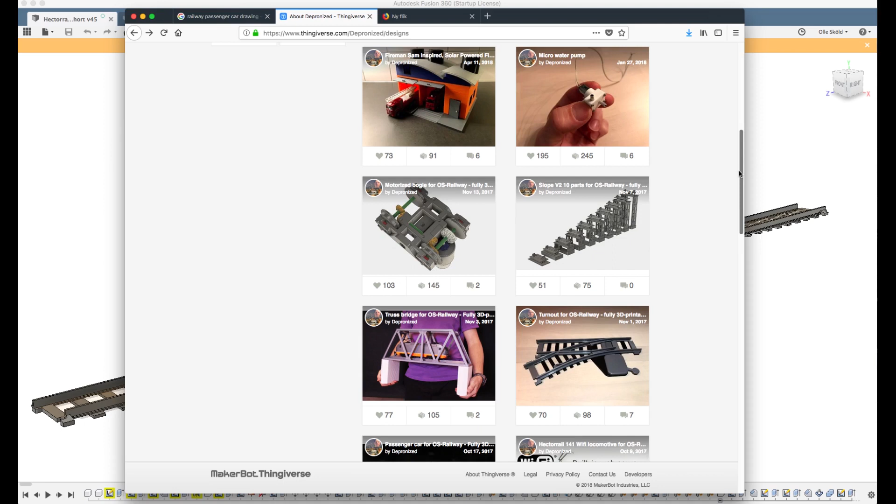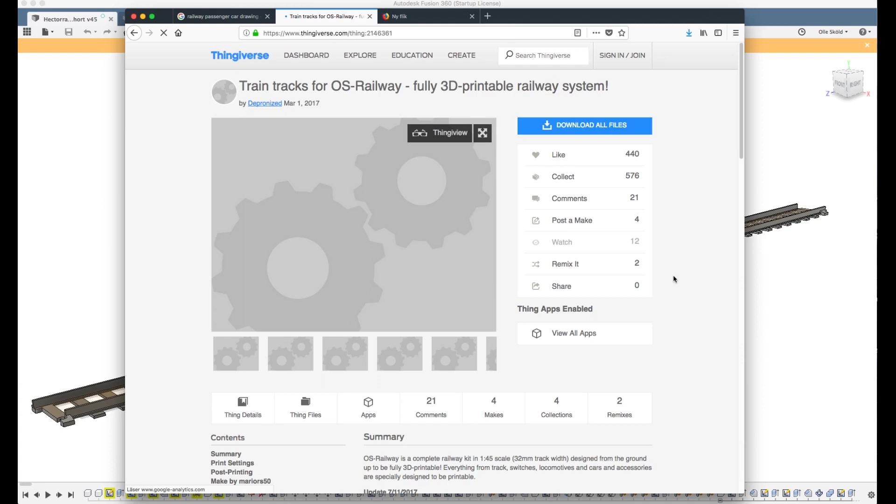It's mostly available on Thingiverse. If you go into Thingiverse and search for either Depronized or OS Railway, you will find the different parts. There's a page for track, and there are also 2 motorized locomotives at this point that you can download for free, print, and build. But in this tutorial I will show you how you can make your own car.

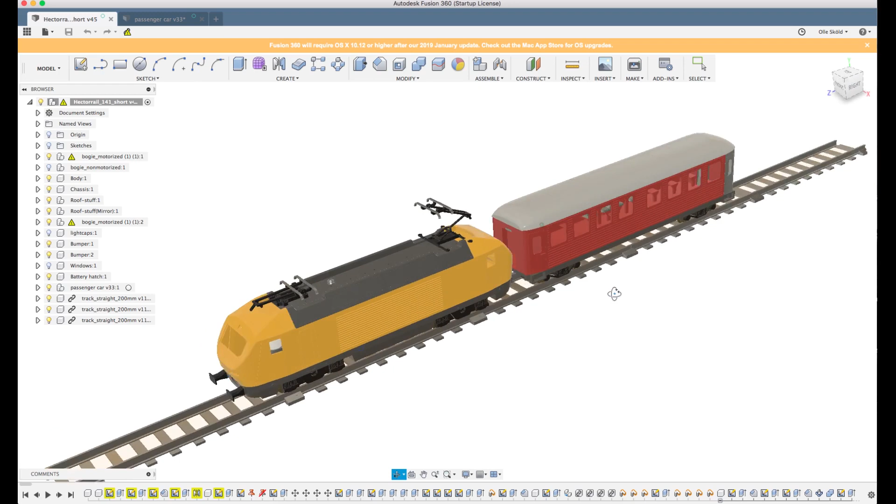This is how the project looks in Fusion 360. I'm using a really old computer, a 2008 MacBook Pro, and you can see it's still working pretty good. There are some hiccups at some points, and I wouldn't recommend doing very tough renderings, but working with mechanical designs is no problem at all.

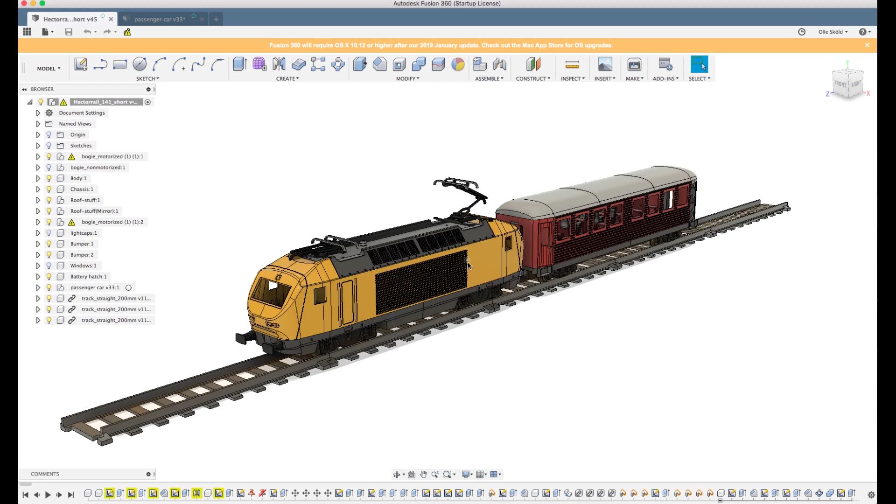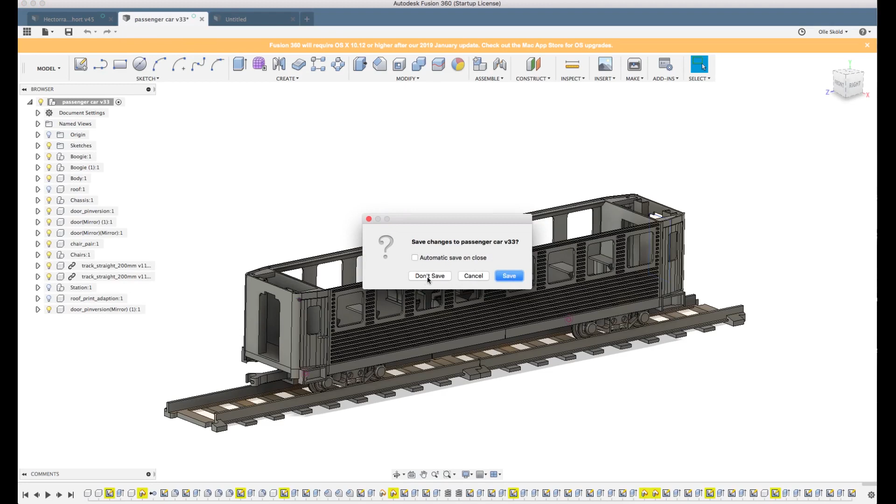So you don't need a fancy computer for this. What I will show you is how you can, in the easiest way, make a passenger car, and it's really unnecessary to do everything from the ground up. I have prepared a few things that you can download and import into Fusion, so I will show you how to do that.

You go to my webpage depronized.com, and you click on forum main page, and you scroll down to the OS Railway printable, the 3D printed railway section, and you click on CAD files. There you can download the track in step format, and you can also download the bogie, because if it's the first time you're drawing something for this, it's unnecessary to draw the whole bogie from the ground up, since that's the most complex part.

So I'd really recommend that you import these pieces and start with that. I will show you how to do that. You click upload in Fusion, and you select the parts.

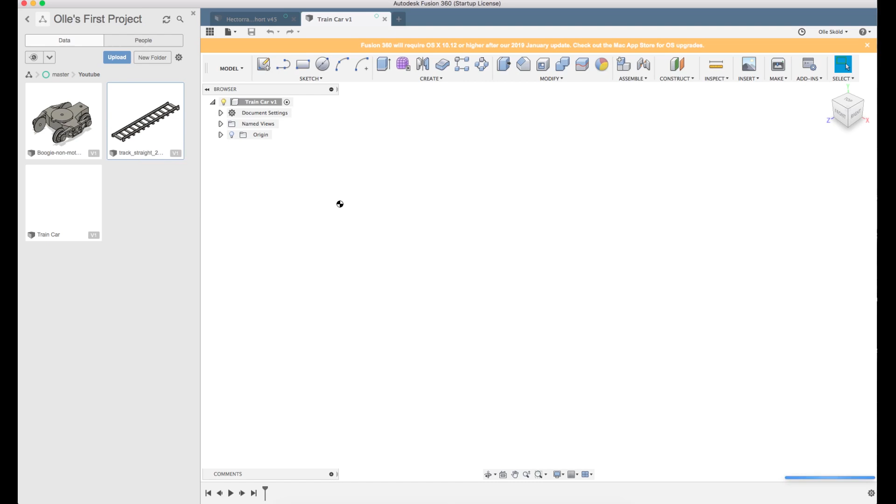To be able to import them into our project we have to save it first, so we'll call it train car. First I import the track section, and you can just click OK on the position.

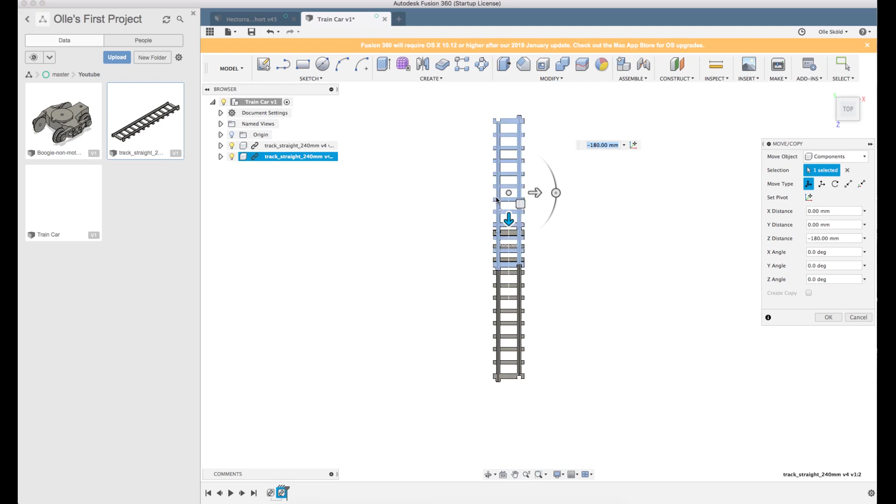I will import another one, so I have 2 of them. To change the orientation like I do here, I hold the shift button and click the scroll wheel on the mouse, and then I can turn around like this, or you can click on the little cube up to the right, but holding shift and the mouse wheel is really convenient.

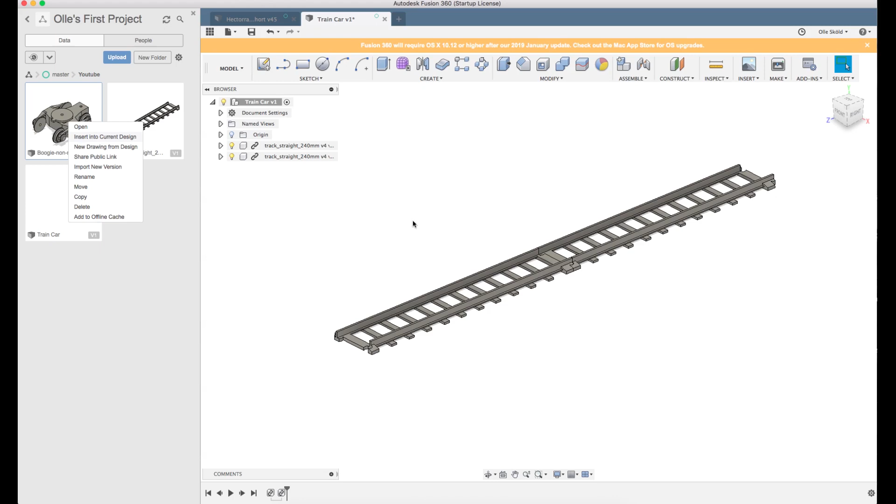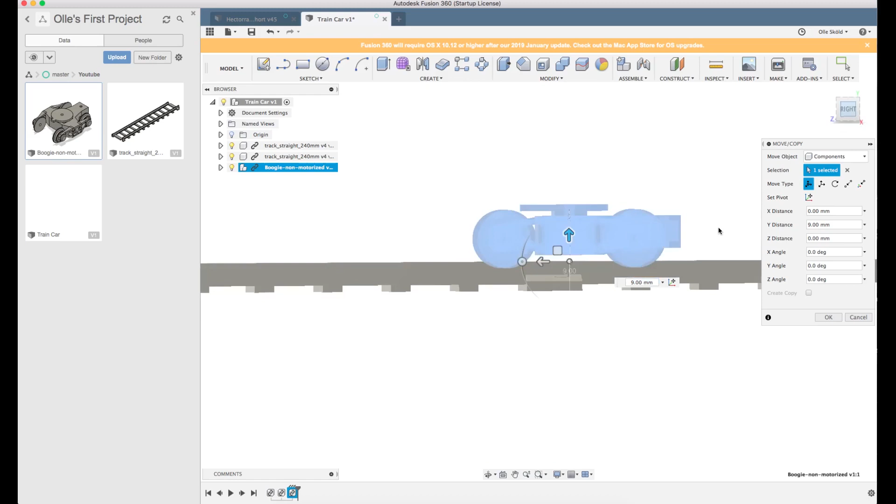Then our next task is to import the bogies. Now you can see that it ends up a little bit wrong, so we will adjust the position. It's not critical where you place the first one, it's the second one that is important, so you get the right length of the car.

I can see that I have it the wrong way, I will turn it around. The reason for that is so that the connection to the other cars is in the right place.

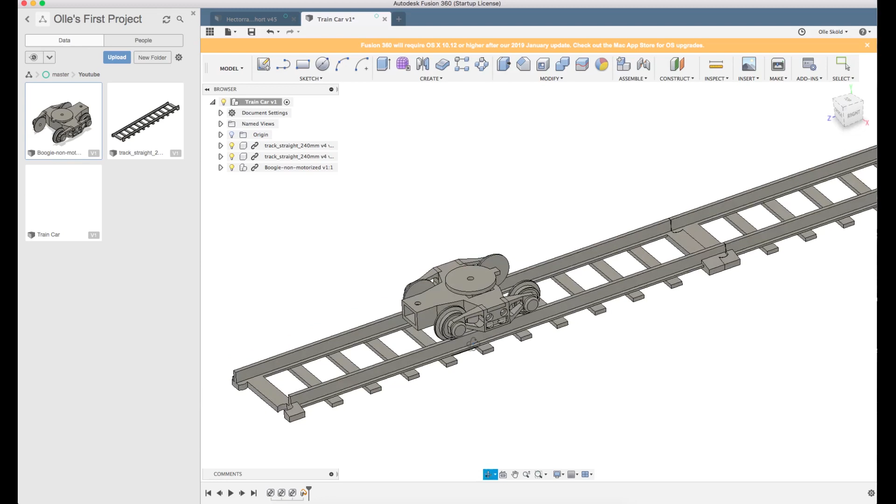Now I will not import it a second time, I will copy it, because then it will go from the same place. And this allows me to adjust the wheelbase.

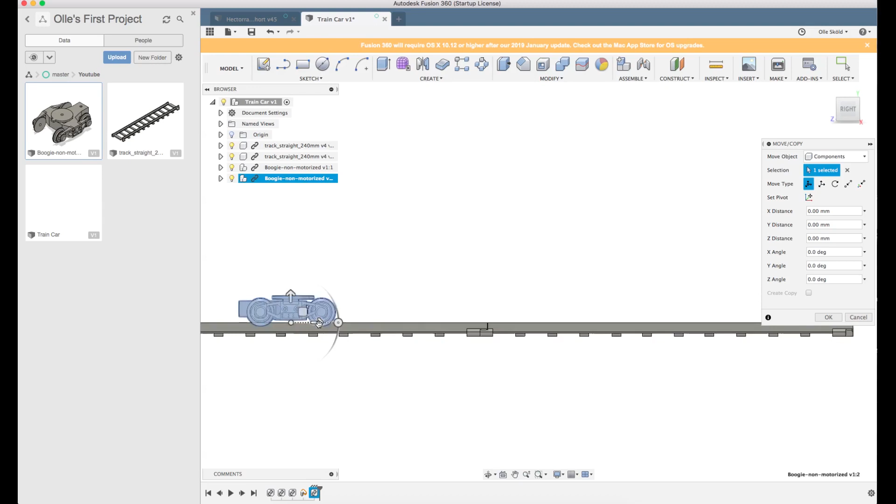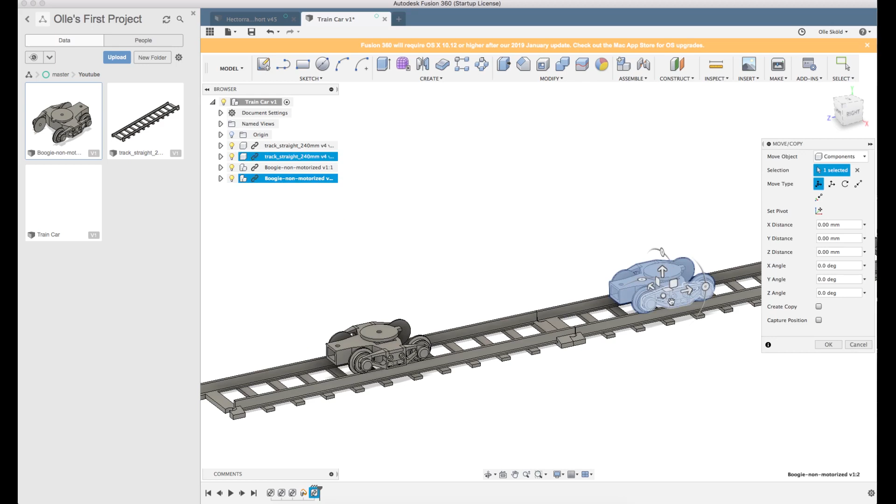What I found when I did cars is that around 200 millimeters is the maximum you should use, because otherwise it gets too long for the short radius of the track. So if you want it to really work well, don't make it longer than 200 millimeters. And we will turn the other one around.

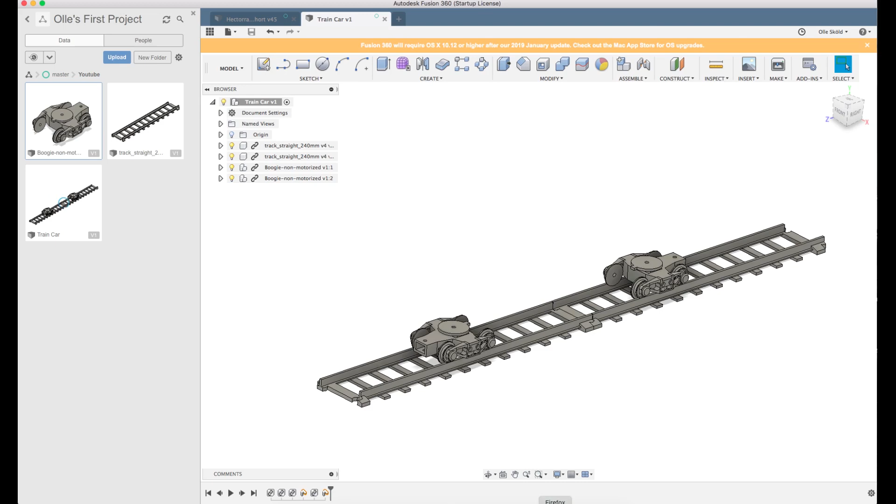So now we have a good starting point, and we will save it for now, because now we need some inspiration for the design. I recommend that you go to Google and make a Google search for railway passenger car drawings or train car drawings.

Or if you have a special car that you want to draw, search for pictures or drawings where you have it perfectly from the side, because that makes it a lot easier to model, since we will use the picture in Fusion. You cannot do that if you have a perspective view; you need it to be straight from the side.

You can also search for blueprint. That will also give you good pictures, but they are a bit harder to use. I will show you, because they are often only lines, so it's a bit harder to see the details.

On a Mac I will hold down Shift, Command and 4. That gives me the possibility to take a screenshot of just a part of the screen. If you're on a Windows computer, you can click on the start button and start writing snipping tool, and you can use that to basically do the same thing.

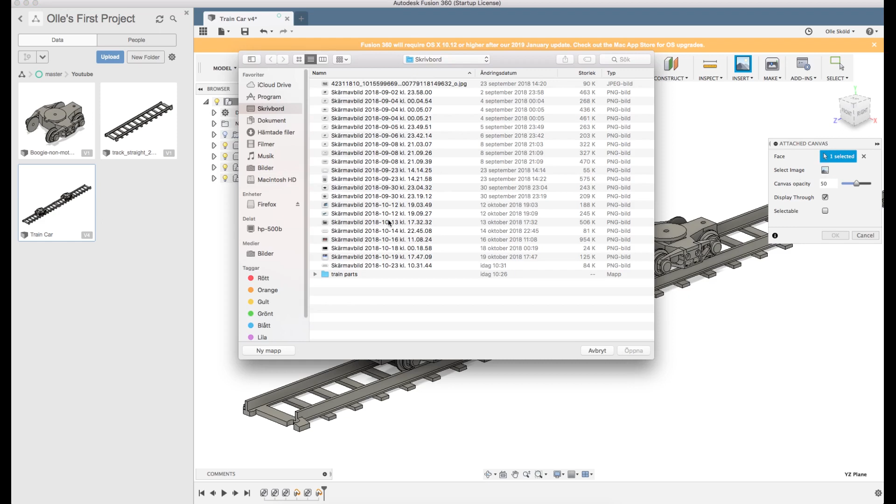Now we will import this into Fusion. So we click Insert, Attach Canvas, and we click the side plane, and we click the Select Image button and choose the screenshot. Now you can see that it gets super tiny, but don't worry about the position and the scale right now, because we will fix that.

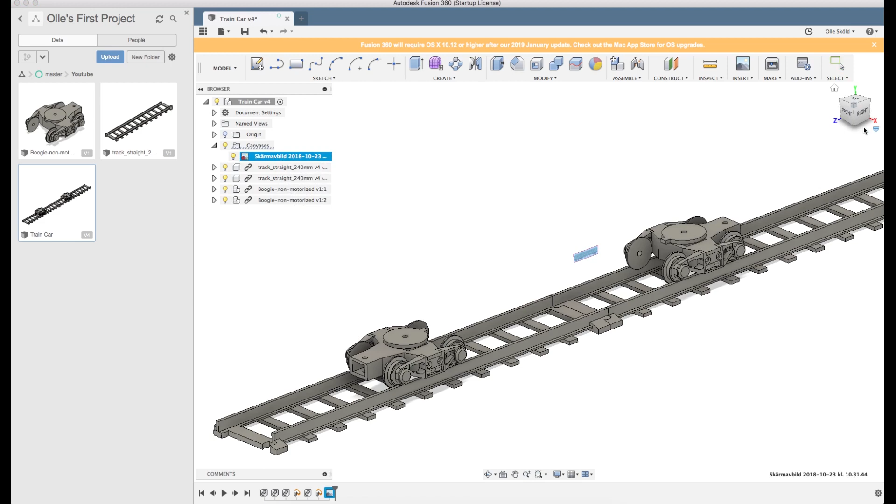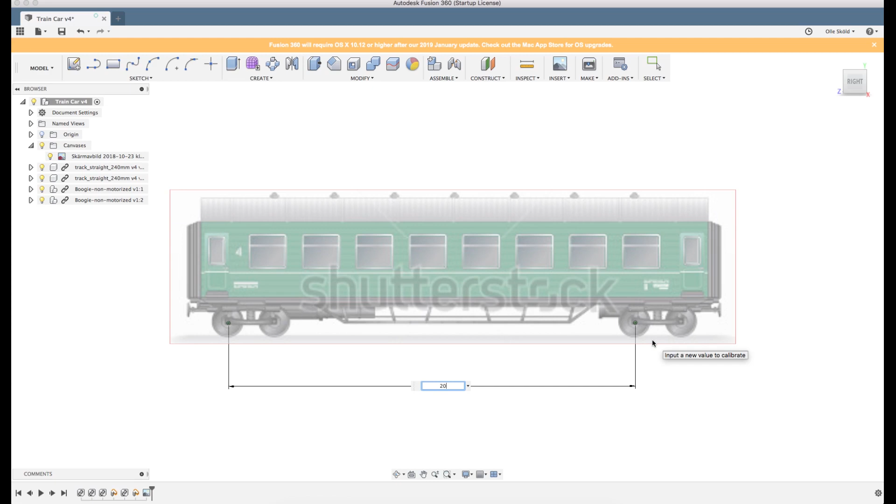Now Fusion has a really nice way to scale pictures. You right click and choose Calibrate. If you need to, first find out the dimension you want to scale it after—now we'll just try, because we don't really know already. So what I'll first do is click on two known points, and I will choose the dimension I think I want. In this case I will try 200 millimeters, and we will see how that looks.

And we can right click and choose Edit Canvas, and we can place it around and see how it looks. And we can now see that this is a bit small.

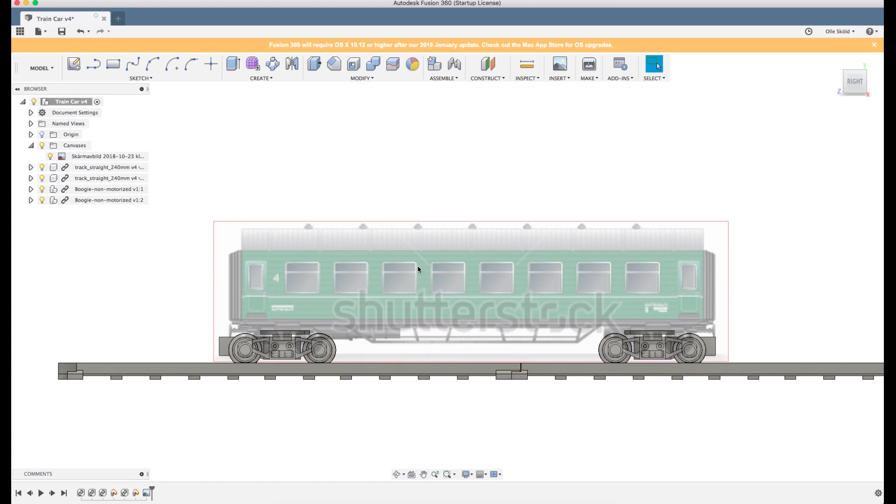So I will again click Calibrate, and I will choose the same position so I have something to relate to. And if it's hard to see, you can unclick the rest.

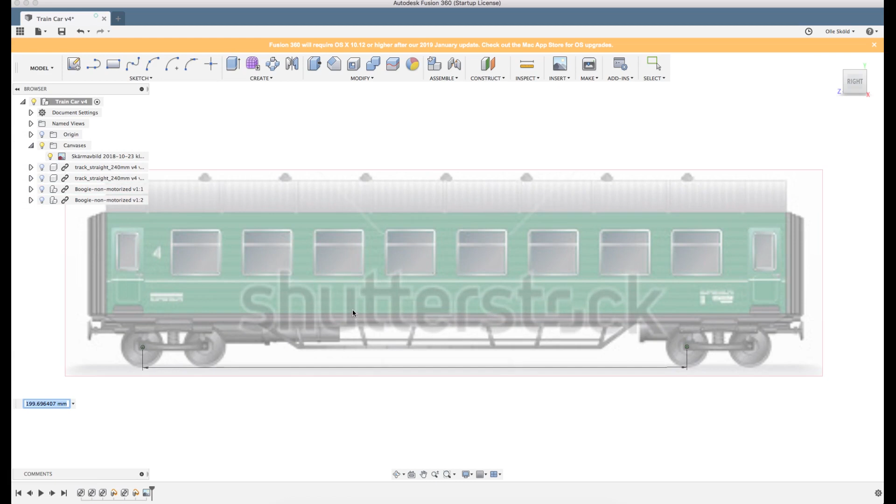How much do you think we need? I will add 40 millimeters and see how it looks. That's a bit too big, so I click Ctrl Z to undo.

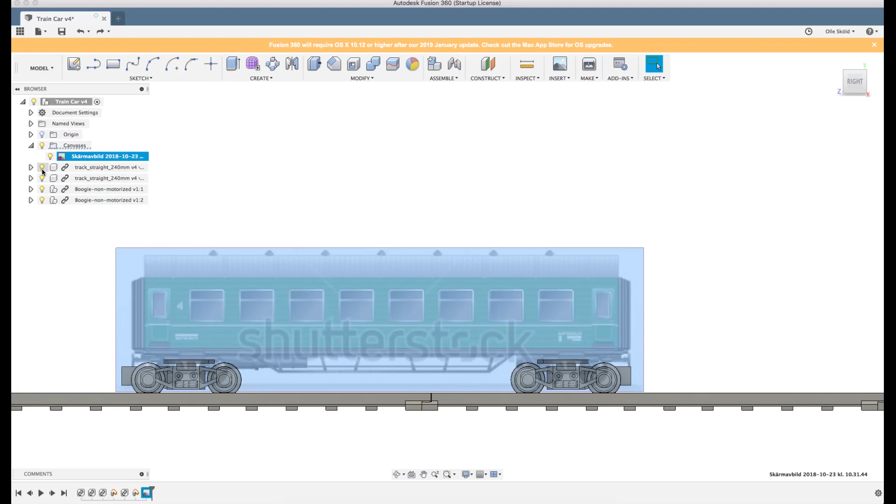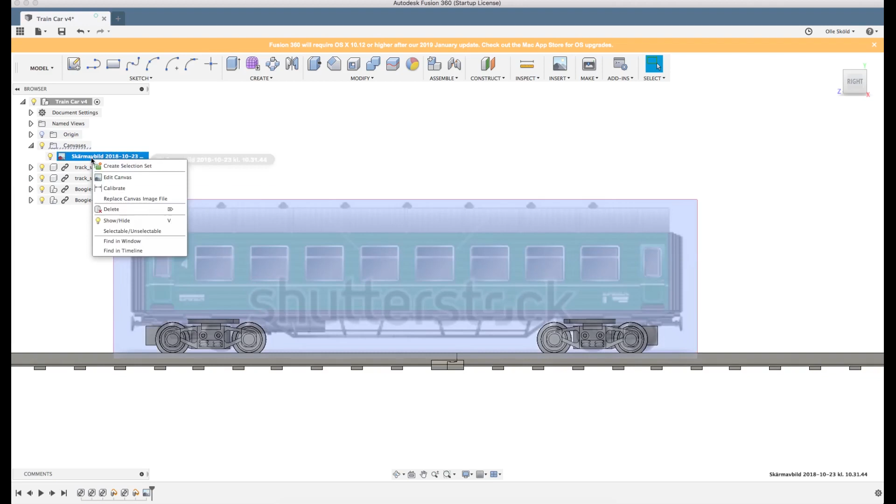Let's make it 220 and see how it looks. That looks better.

Now what I want here is a small overlap between the connection part here—I don't know what to call it—and the end of the train car. I don't want too much overlap here because then it will not work when you attach it to the locomotive and other cars. So this looks reasonable.

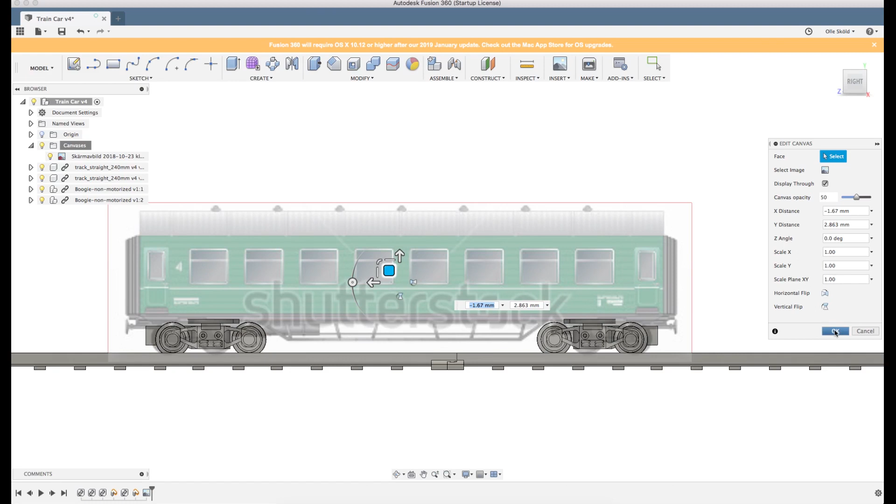So we will click OK, and now we will use this as a reference when we create the rest of the car.

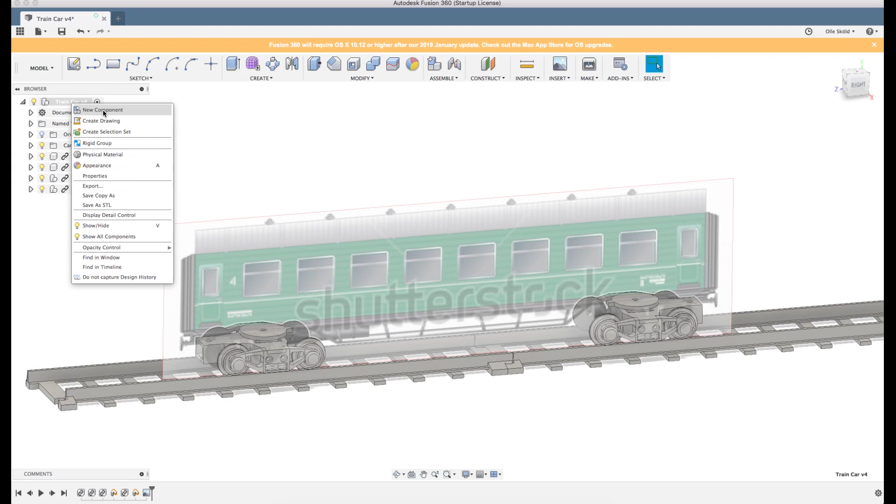Now one important thing to know in Fusion, to make it a lot easier to work with a project, is components. So you right click on the top and you choose New Component, and let's call this the chassis.

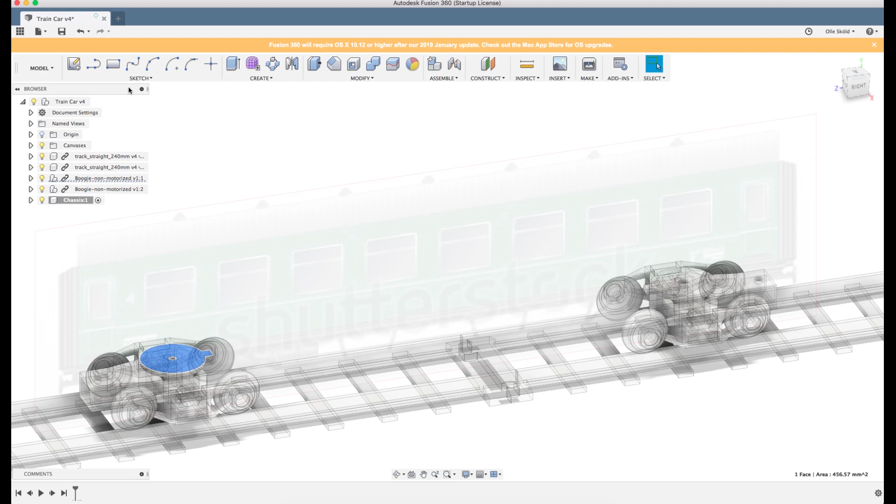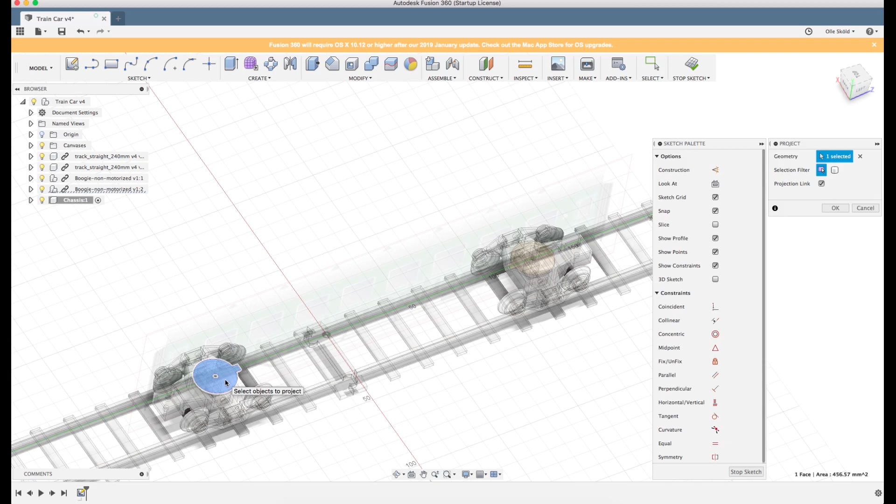And we want the chassis to attach to these plates. So what we'll do is we'll click one of them, and we click Create a Sketch, and you can see that one of them is now lit. But we want the sketch to know about the other one as well, so we can click P for project, and we can click the other one, and OK.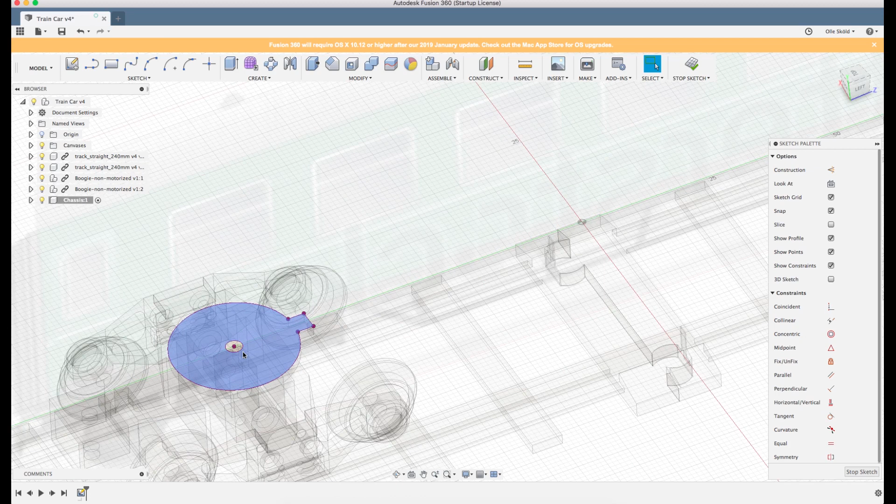We can also, if we want, click this one also, so it has the edges. Now our sketch knows about these edges and these parts that we want to connect it to. We want to make sure these holes for the screws end up in the right place.

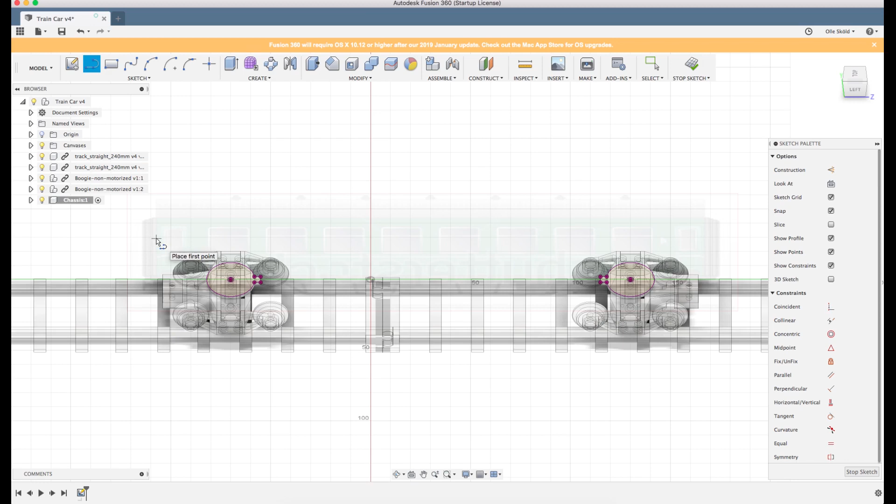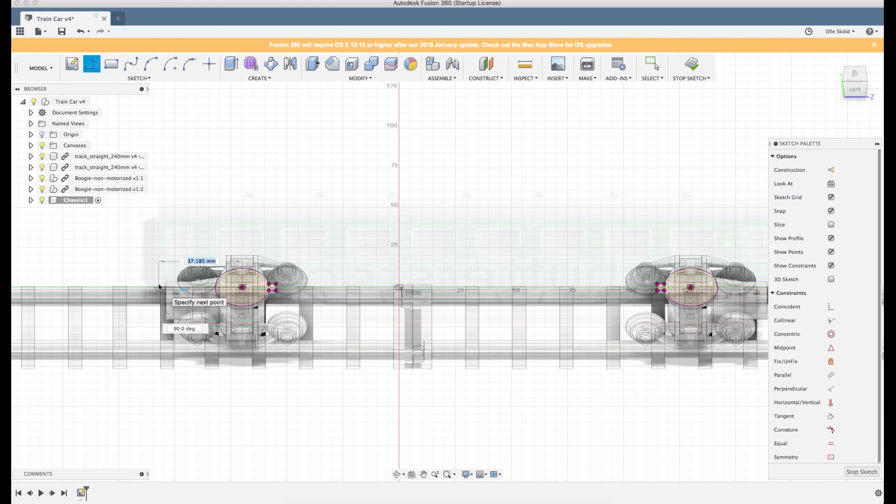Now one nice thing to do if you want to know how long you're going to make the chassis, you click on this side so you can still see your canvas and also see the sketch. What I'll do is click L for line and just click somewhere on the canvas to see how long it will be, 277. Let's see how long we need from the center of the bogie. It's like 37 millimeters.

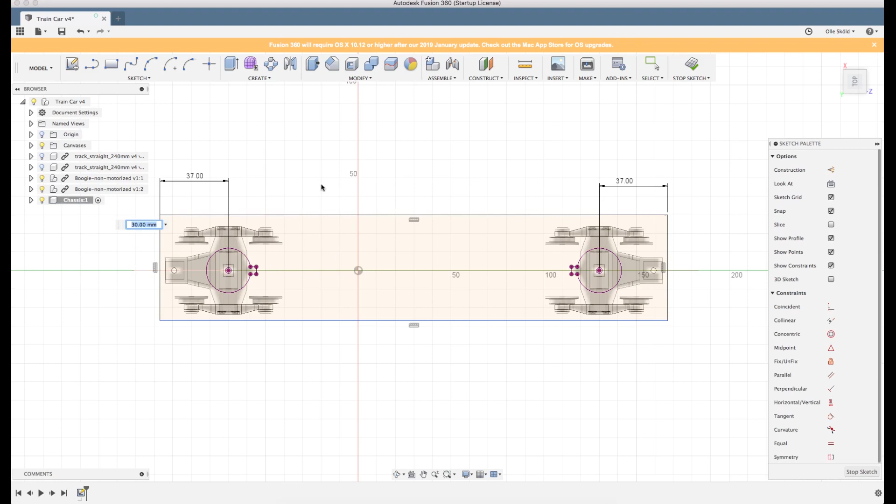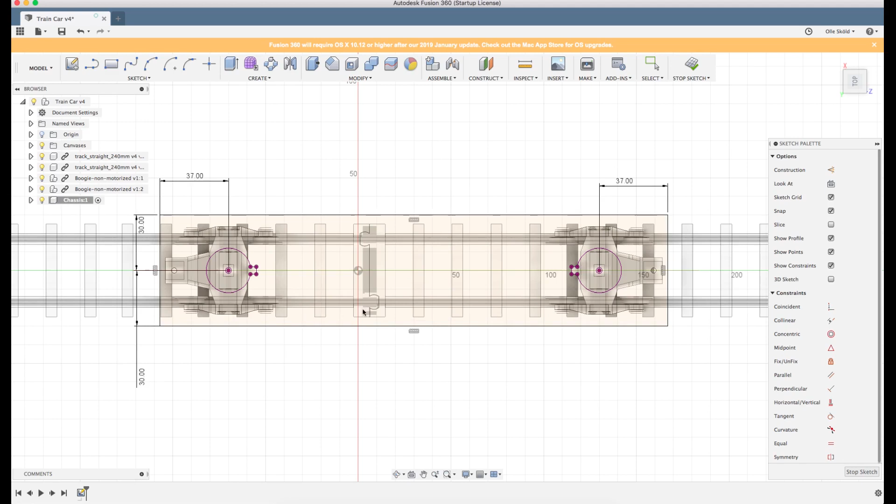So what we'll do now, I will hide the track so we don't have so much going on. I will make a square, I click R for rectangle, and insert the dimensions. Now we don't know exactly how wide we want it. I think I want it to extend a little bit outside the sleepers, so let's try 30 millimeters. We can change it later on if we want to. So there we have it.

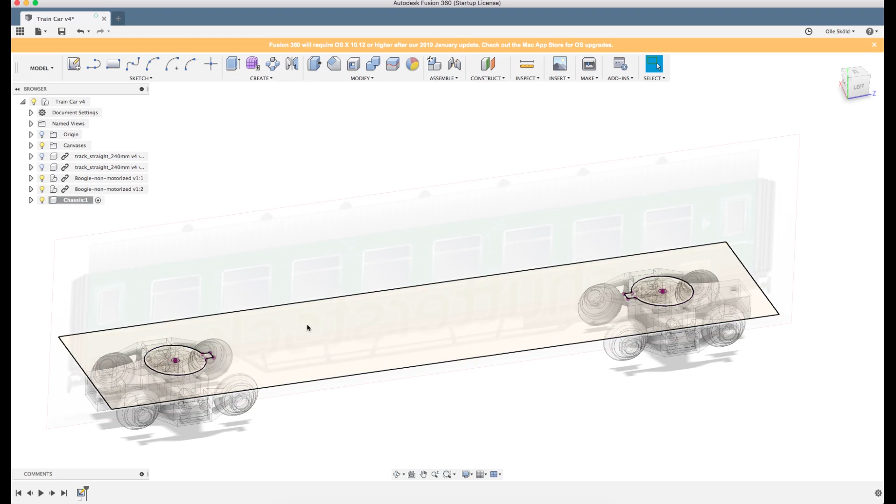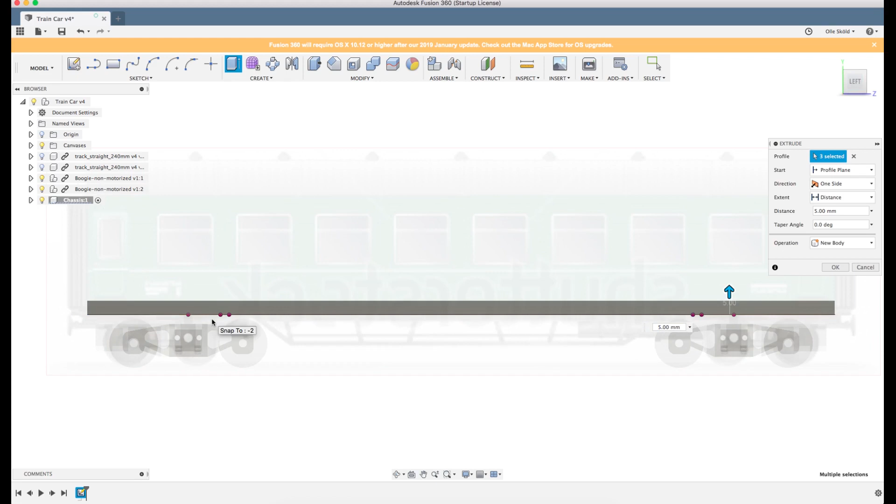Now I hold the command button so I can click several of the surfaces, because you can see these lines, otherwise they leave a bit that is not extended when I click extrude. So I need to click these as well, and then I click E for extrude. 5 millimeters seems to be a bit much, let's make it 2 millimeters.

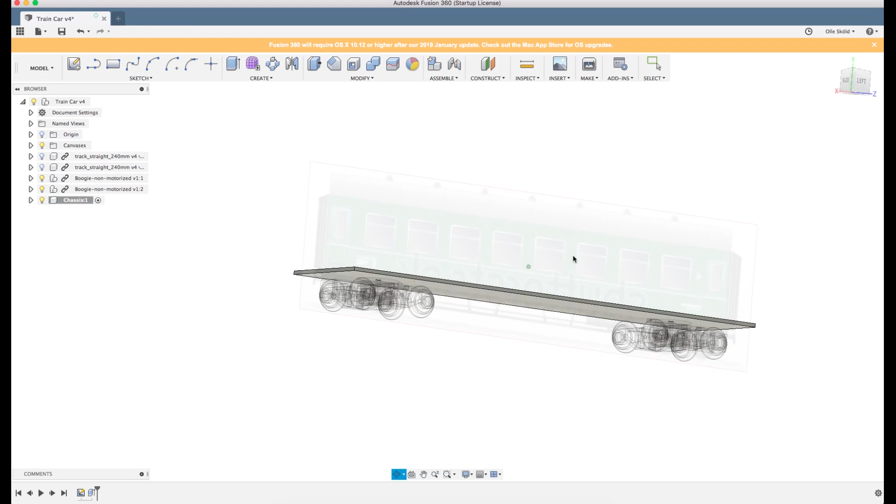Now if you want to see how it looks with the track and everything, you can right click at the top of the tree and click activate. That will make everything visible in the same way.

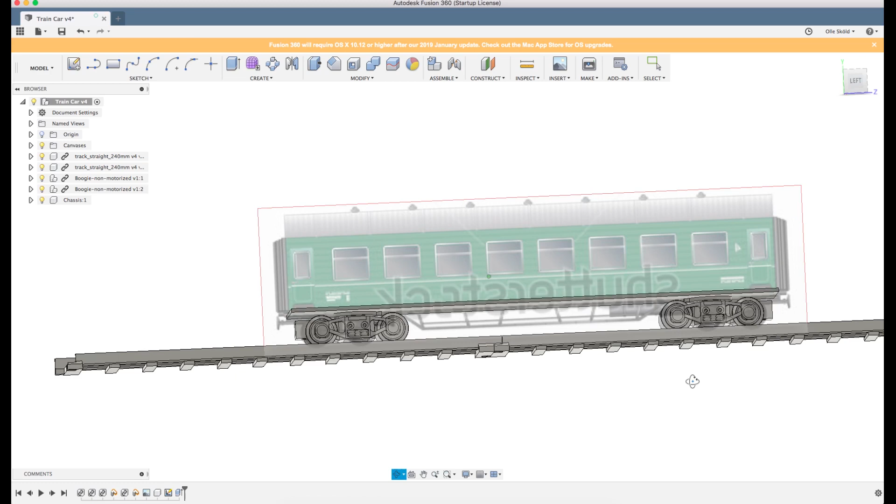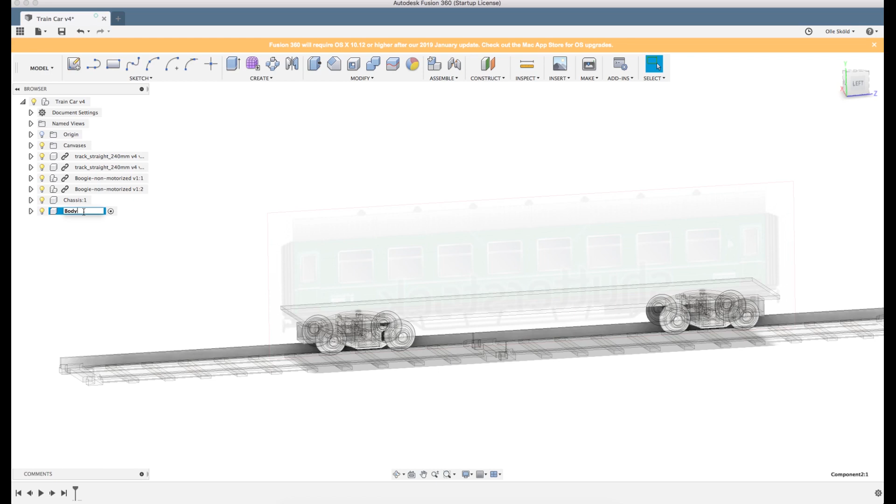Yeah, so let's start with that, and now we can make the body. So we create a new component and call it body. Now we click the top of the chassis, that means we will automatically get the edges.

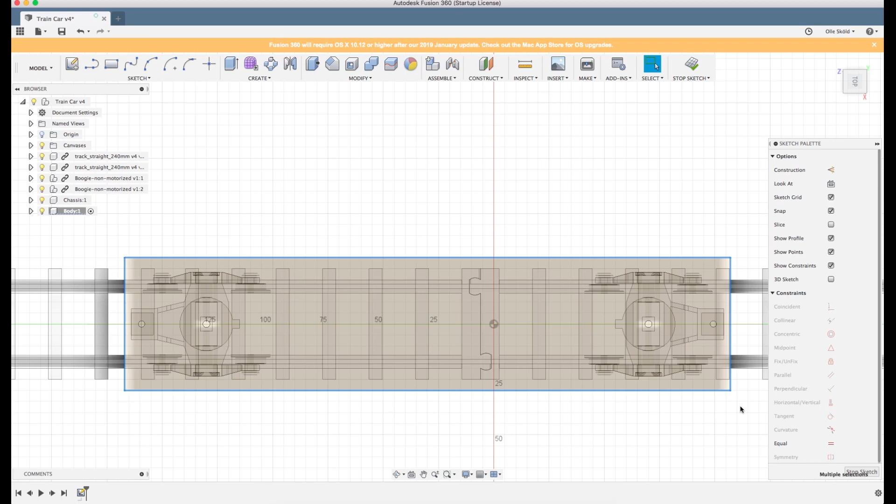Now what we can do, you can double click on the edge so you can see the whole edge is selected, and you can click O for offset. What this does is create a new line along the whole selected edge, and you can choose how far you want it. So what we're basically doing now is the thickness of the body, and I will make this one 2 millimeters thick.

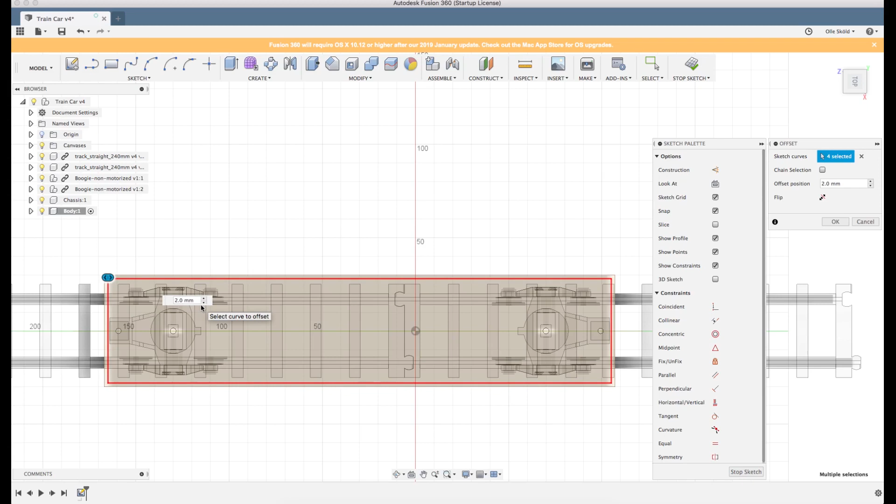Now you can either click stop sketch and click on a surface and extrude it, or you can do it directly in the sketch. I will do it this time. I will click the edge, and you can either click on the extrude button or click E.

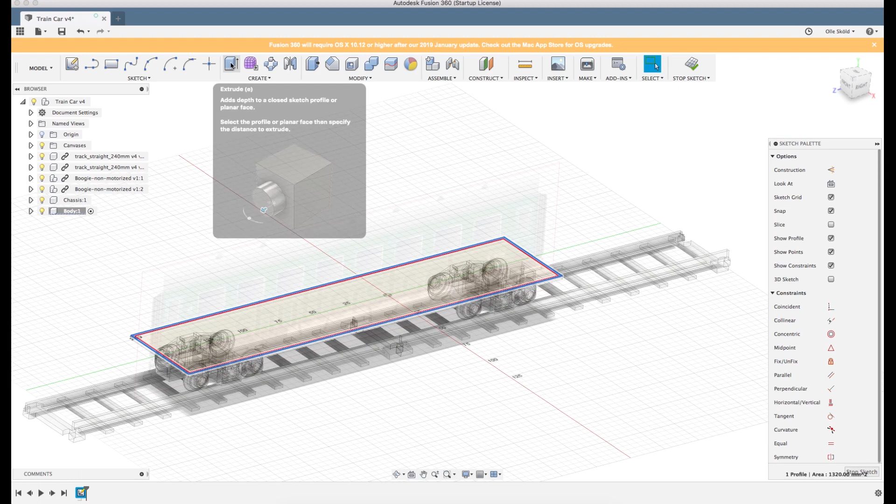I'm used to working with the commands now, but I will try to click some of the buttons so you can easier follow what I'm doing. So I will click extrude, and now I don't know how far I want to extrude this, so I will click the side view so I can look at the canvas at the same time, and we can extrude this up right up to the roof.

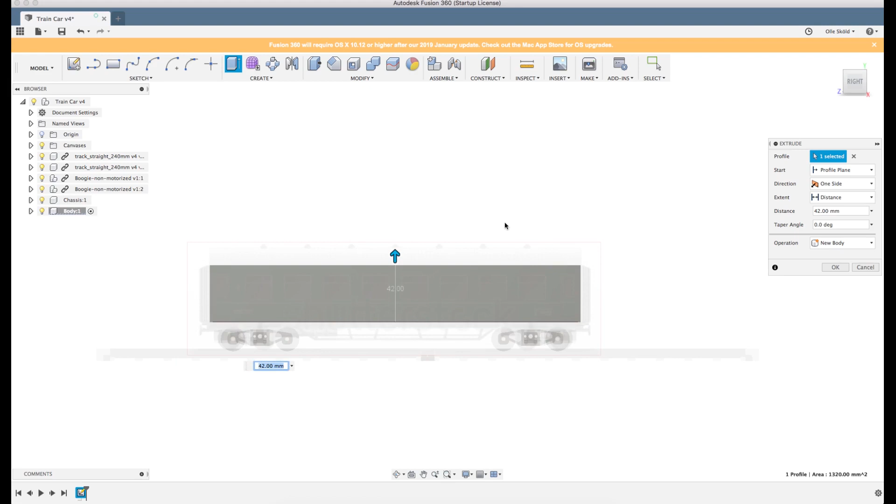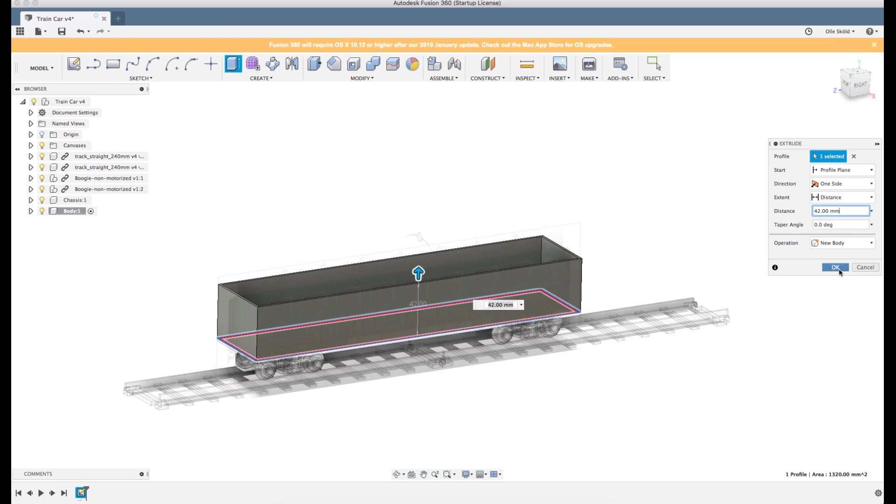Now you can see that the canvas is really dim. That's because it's not located inside our component. This is something that is a bit a shame in Fusion, maybe there's a possibility to make it more visible even if it's not in the component. I guess there's many times where you have a canvas that you use for many components, but what you can do is place it inside the components. If there is one you work with a lot of details, for example with a body, you could place it inside the component, and that would make it more visible when you're working. Especially if you have a lot of small details, I would recommend that you do that.

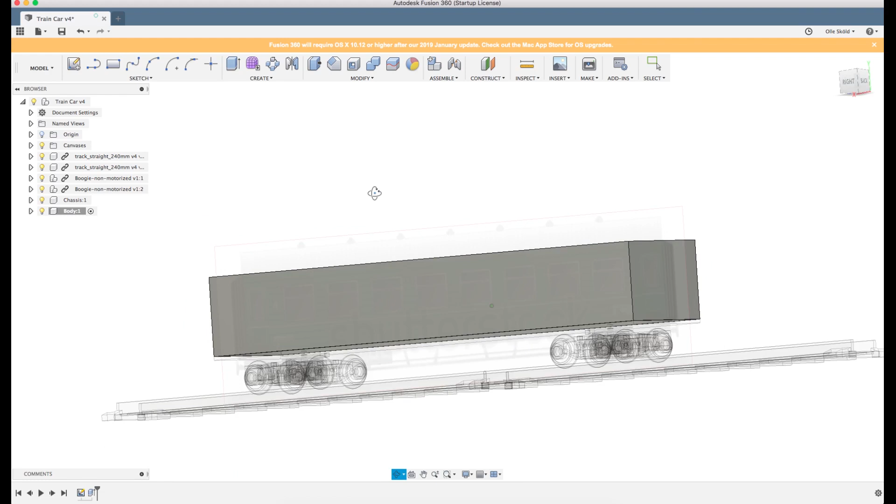So now we have the basic geometry of the body. So what we're going to do now is the windows.

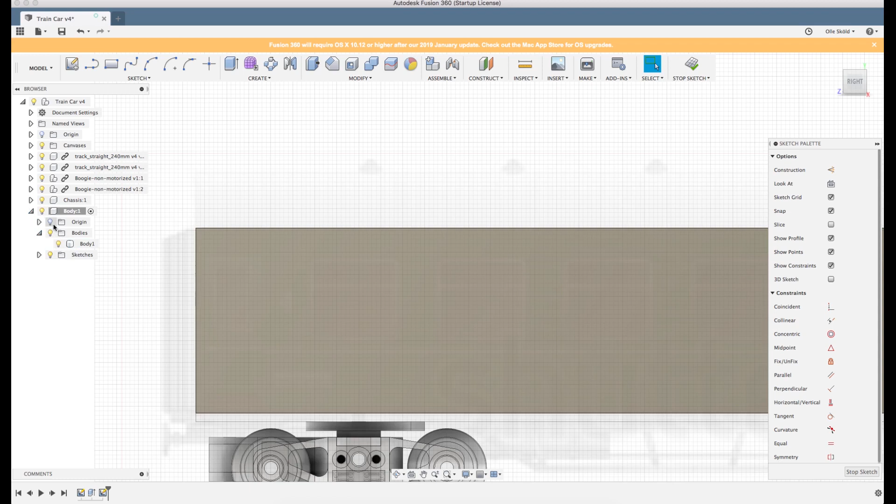So I click on one side and click sketch, and then I want to see these windows a little bit better. So what I can do is click on the component I'm working on. I click on bodies and unclick the body I've just created. That makes it a little bit easier to see what's going on. And now we will select the areas that we're going to remove to create the windows.

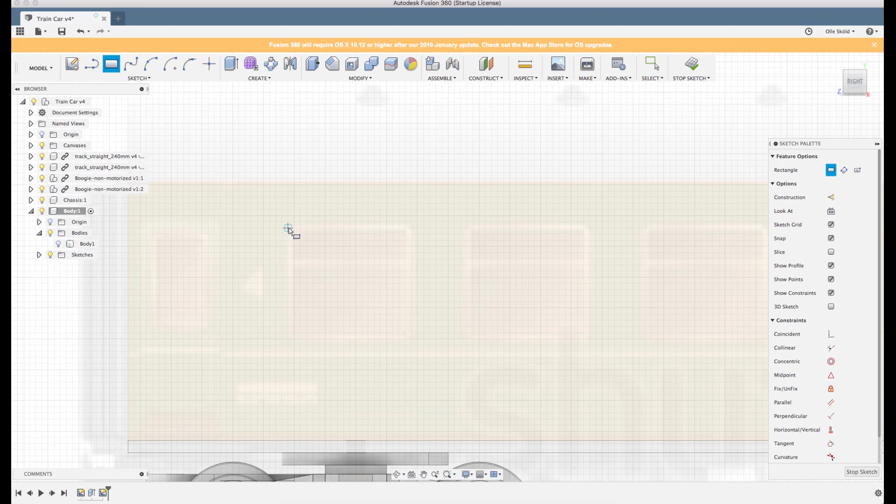And what we can think of now is, do we want a separate frame for the windows, or do we just want a cutout? In this case I will actually do a frame. So we'll do like this. We will select the whole window.

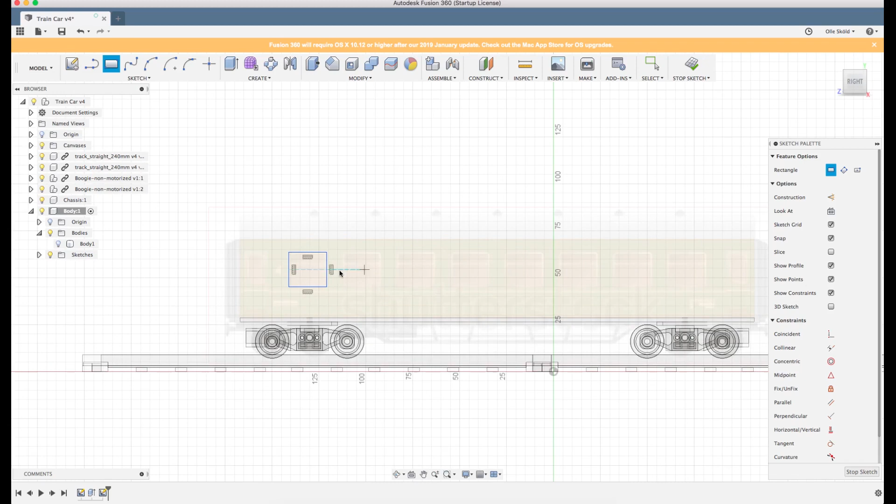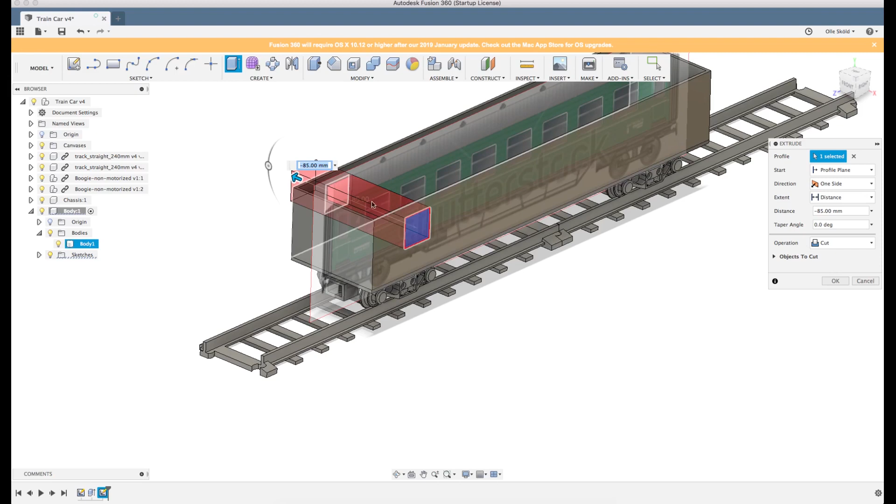Now if there's only a few of them, it's easy to just draw them, but I'll show you another thing you can do. I click extrude, zoom out, and now I have to select the body again so Fusion knows what I want to do. I draw straight through, and you can see it automatically turns red. That's because Fusion thinks I want to cut, and that's what I want to do in this case. So I click OK.

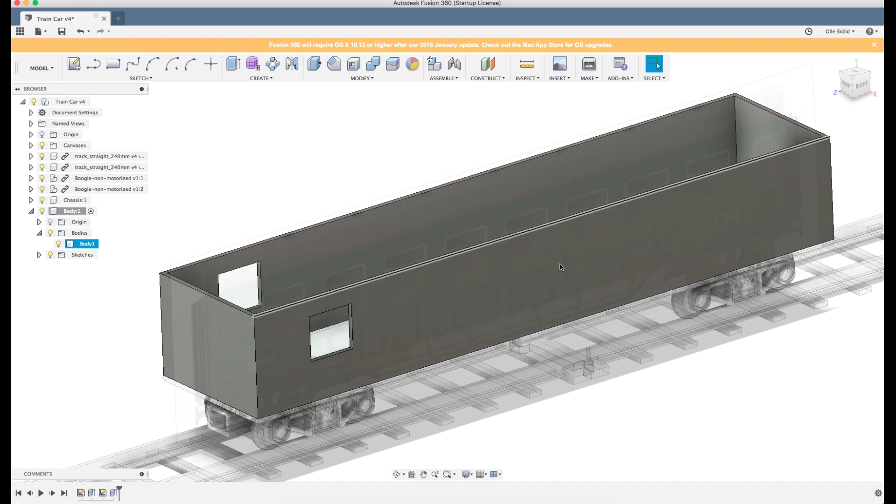Now that is one of the windows. Now what you can do if you have a lot of small details of the exact same shape and you want to do them on a straight line, you can use pattern on a path. It's a little bit sketchy, sometimes it doesn't work, it gives you really strange error messages. I don't know what they are, but we'll try.

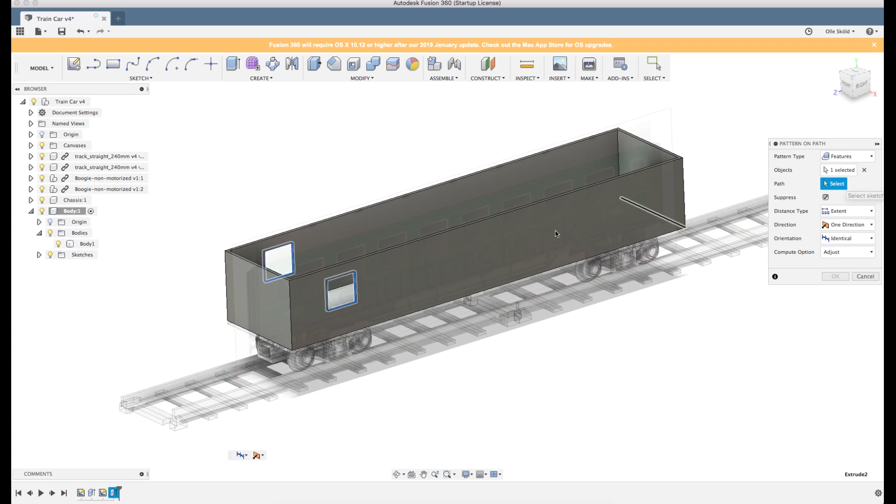So what I then choose is features, and I click on the window extrude. Then we need to select a path, and I click one of the lines, and now it actually gives me a warning. I don't know, it's not a really informative warning, it just says the input is wrong. I don't know why it thinks it's wrong.

And how many windows do we need? We need 1, 2, 3, 4, 5, 6, 7.

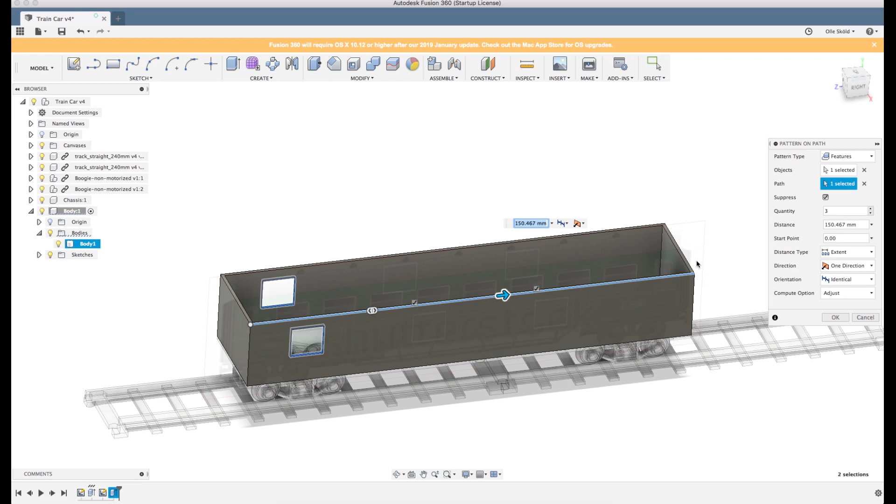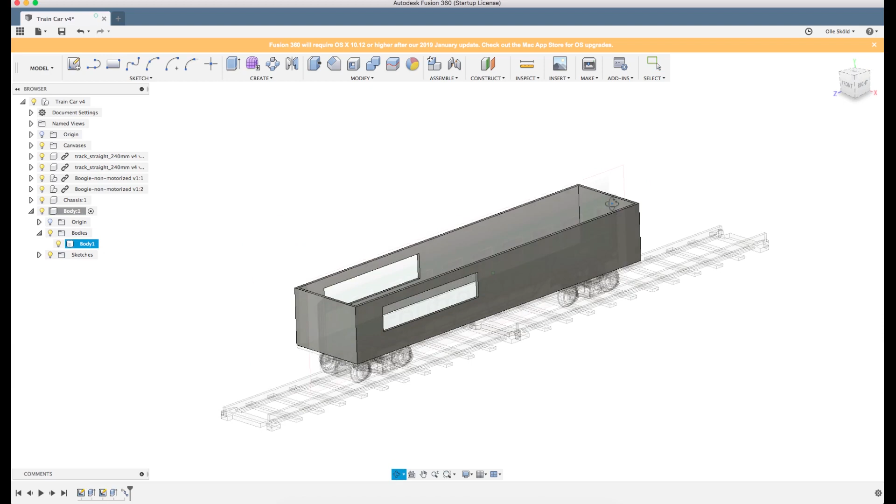We'll see if this works even though we got the error message. No, it didn't. Let's see what happens if we just extend it more. No.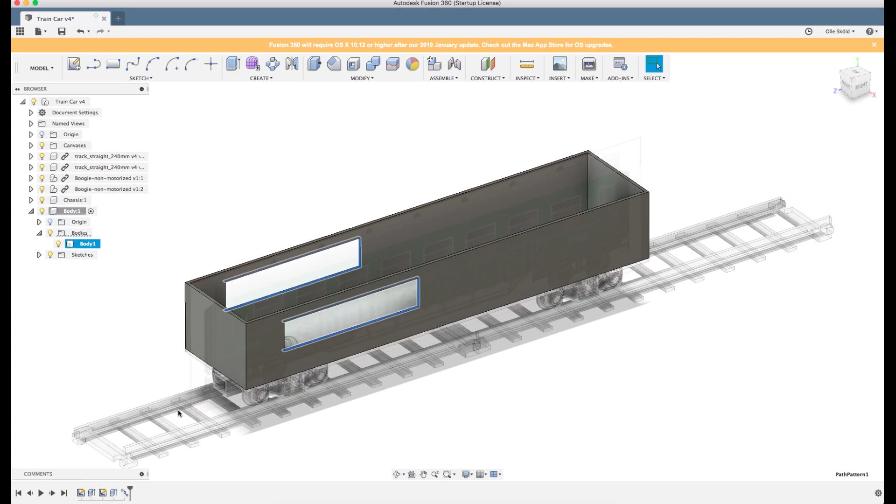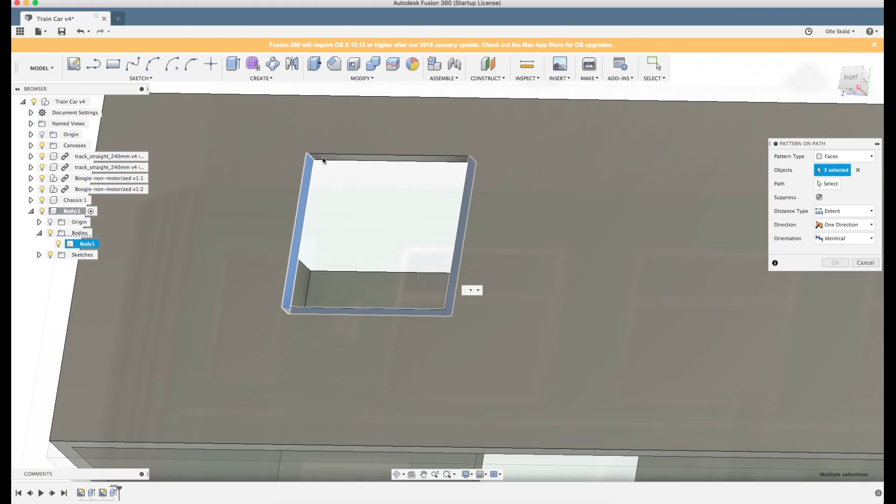I will try one more thing. I will select these faces to see if it was the selection or the path that was wrong. I suspect it's the path, so this will probably not work, but I'll try anyway.

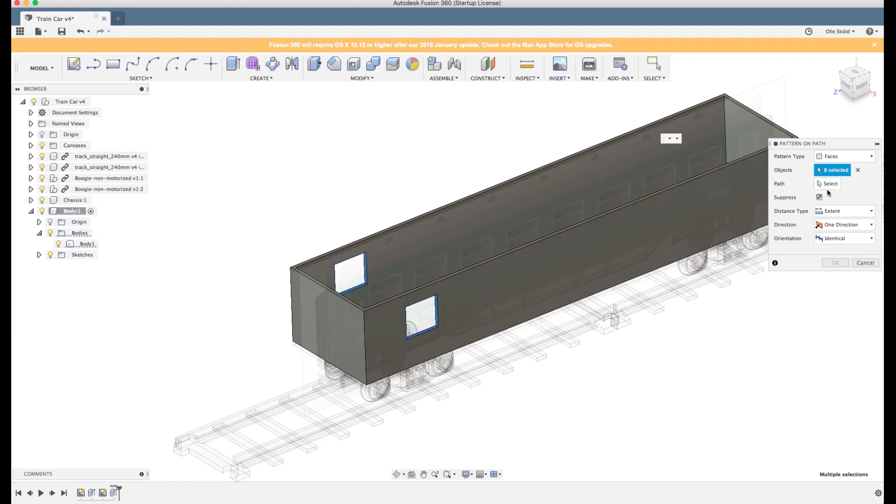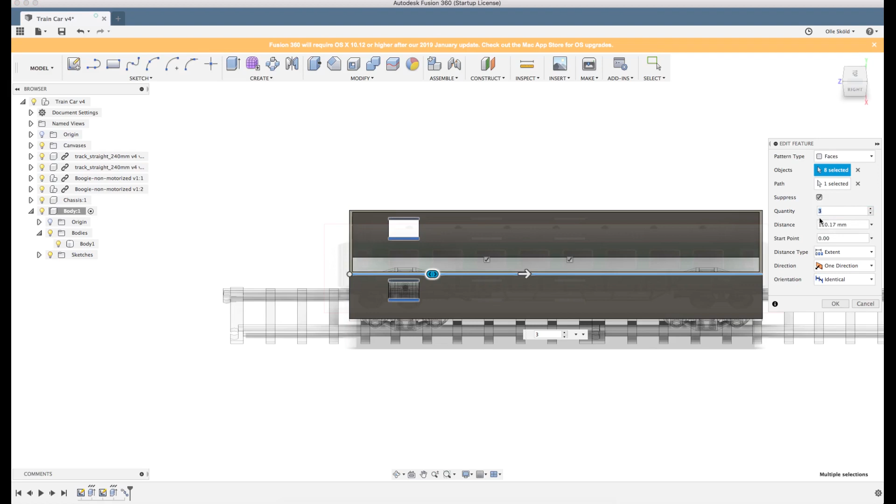Now here's the really informative warning. It would have been nice if it told me a little bit more of what's wrong. So obviously it's the path, but now it looks a little bit better. So let's try to make 7 windows and see what's going on.

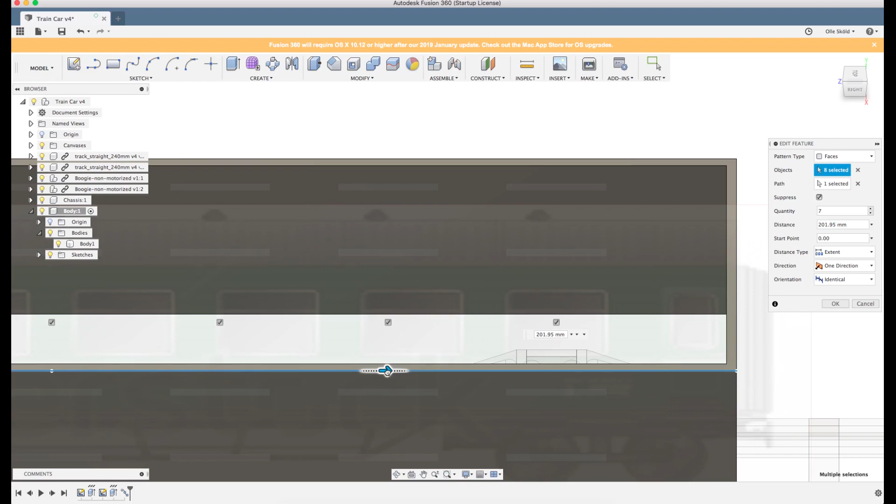And what I try to do now is align this really hard-to-see piece here with the window in the canvas. It's not some super precise thing going on. You can do it with micrometer precision, but for a model like this I just work with it visually. Yeah, there we are.

So now we have our basic windows. Now, as we're doing this for 3D printing, we have to have in mind how it's going to print.

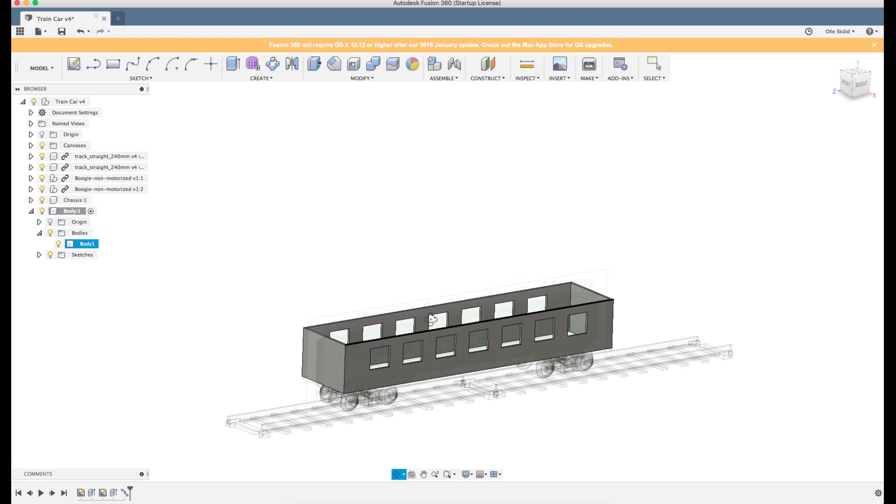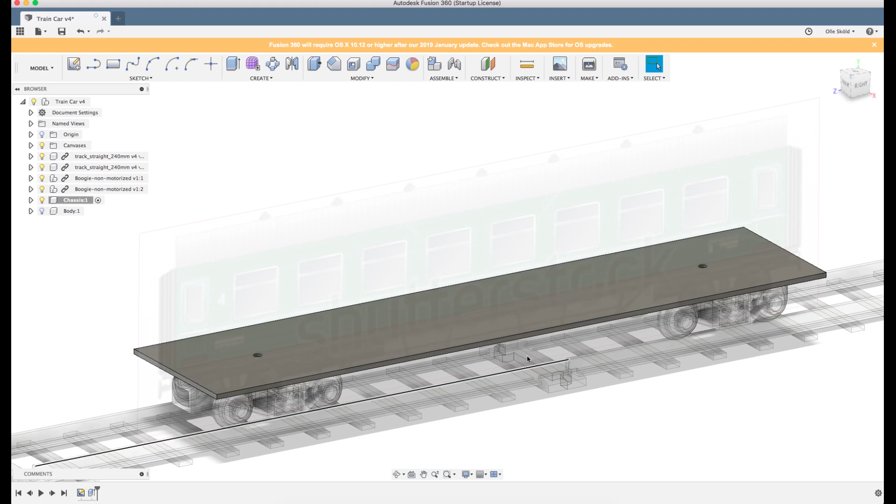So one thing that is important is to think of orientation when we print this. We want to place this on the print bed, and also with the chassis we want to place that on the print bed, but upside down, so we don't do anything on the upper side of the chassis. We leave this completely flat so we can place it on the print bed. But we can do whatever we want on the underside. We can place some components, some details there, and we're gonna do that later. It's important to have this in mind with the orientation right from the start, so you don't have to redo a lot of things.

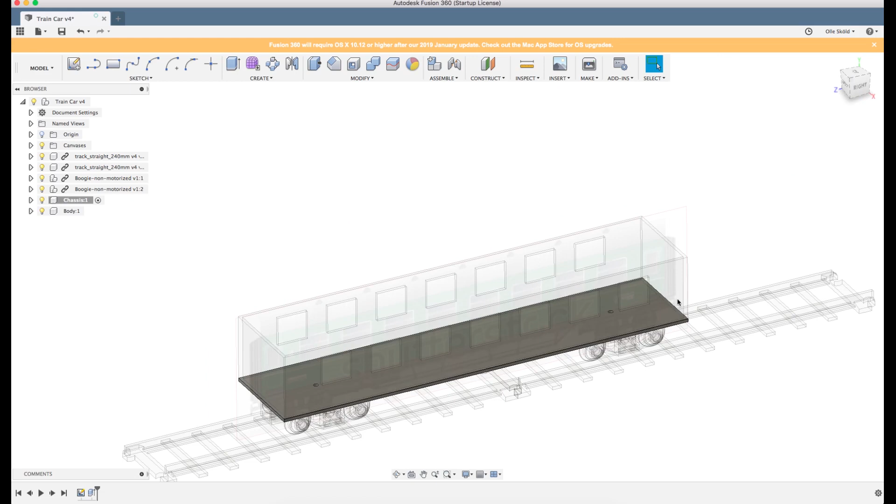Now, if there are things you want to place on the upper side of the chassis, you can make a plate with the details that you print separately and glue it in later. That can be, for example, tables and stuff like that. Or you can place them inside the body and attach them to the wall, because we're printing the body as it's oriented right now, we can place things on the floor there. Just don't attach them to the chassis, because that will not work.

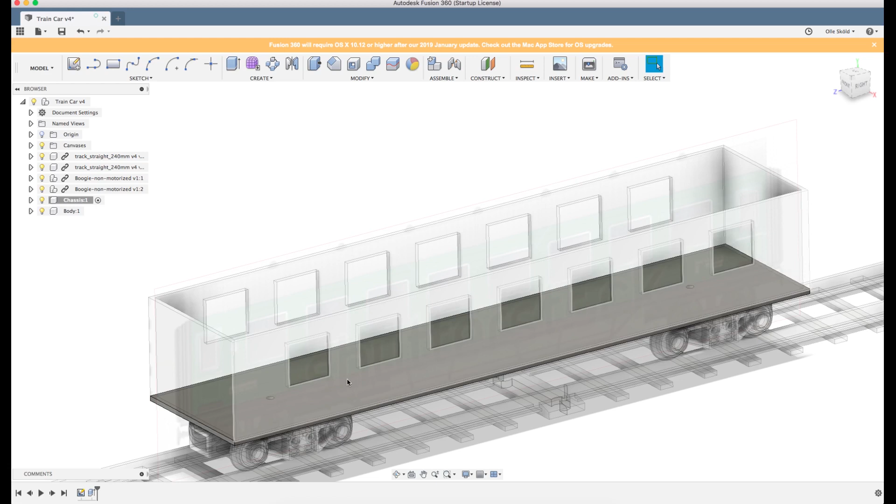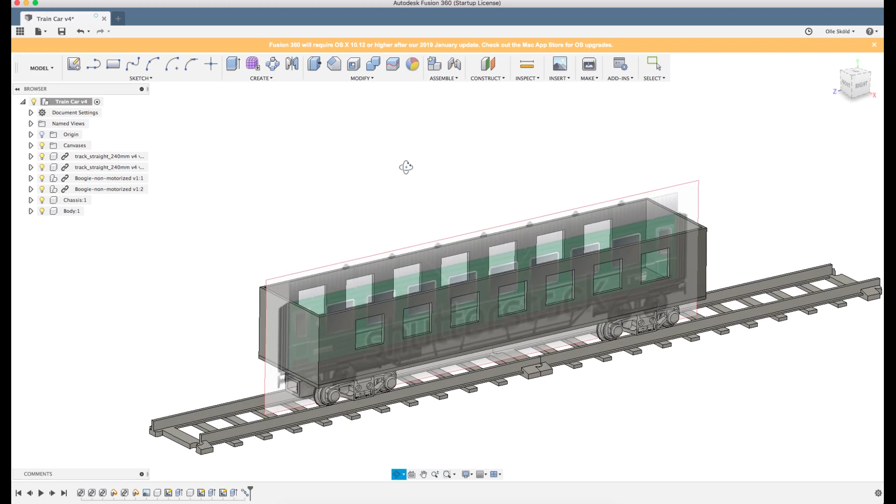Now we can activate the whole thing, and we can look at it and see how the geometry looks. Looks quite okay in my mind. But we need some more details because it looks a bit flush.